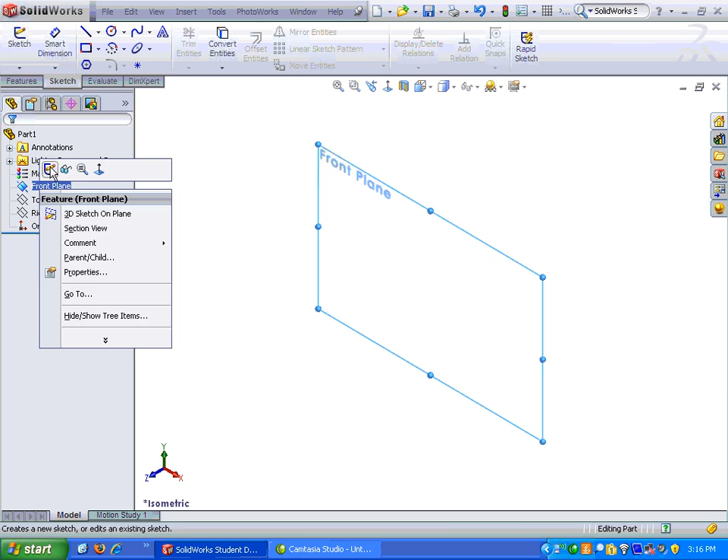Okay, first place we're going to start is the front plane, and as I get the front plane turned on, I will talk to you about how we're going to accomplish this. So front plane, hit the sketch button that rotates it for me. I'm just going to zoom this over into the corner a little bit.

And notice on the picture, on the documentation, we are going to sketch this portion of the wheel. Then we're going to mirror it over to the left side over here. Then we're going to put in a center line down here and revolve it around the center line to produce our wheel. It's kind of a fun little drawing.

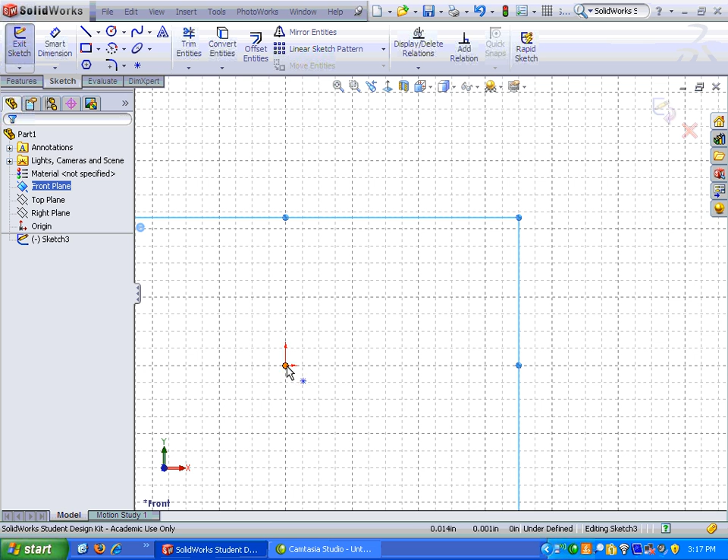Alright, so I'm just going to take the line command, and I'm going to hover over the origin. Maybe I'm going to take the line command. Right click line. Let's try it that way. I'm going to hover over the origin so I'm straight above it. And I'm just going to start sketching this profile in. And about 0.75. Remember, we're going to come back and dimension this.

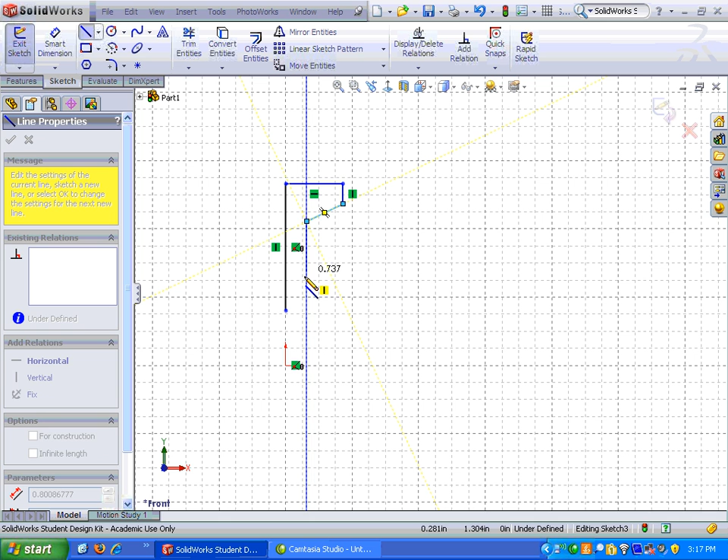Now I want to make sure that this line is on an angle right here and not locked in horizontally. So I'm going to come down. And I don't want to lock this in up above. I want it to actually be a little bit shorter, but I do want to lock it in. There we go. So let's start with this sketch and see if we can put some dimensions on it and make it look the way we want to.

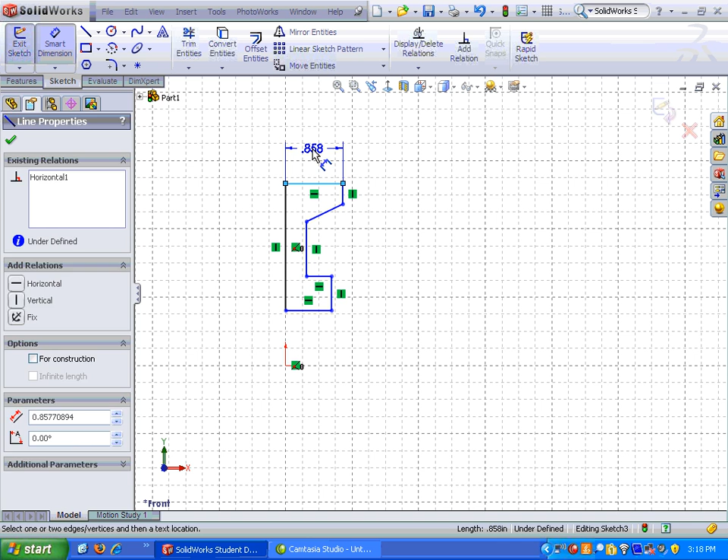I can either hit dimension here or right click and start dimensioning. I can see on my profile that this dimension is 0.75. And I'm going to do this as quickly as my computer will allow. I can see that the bottom one is 0.6875. This little line right there is 0.125.

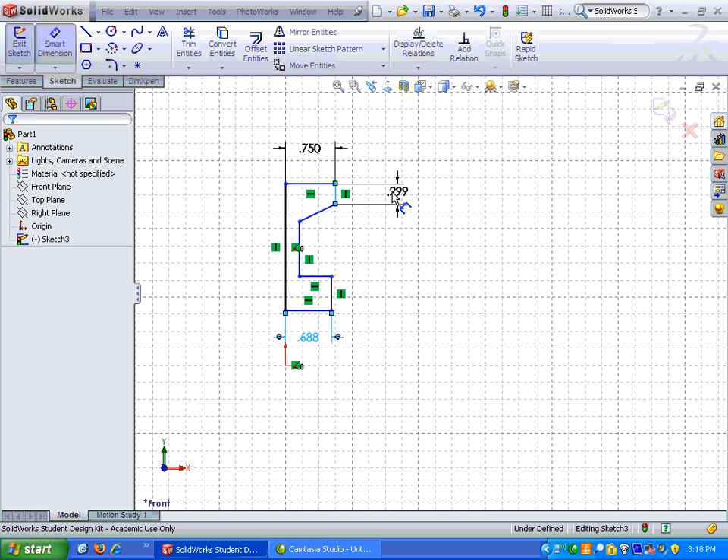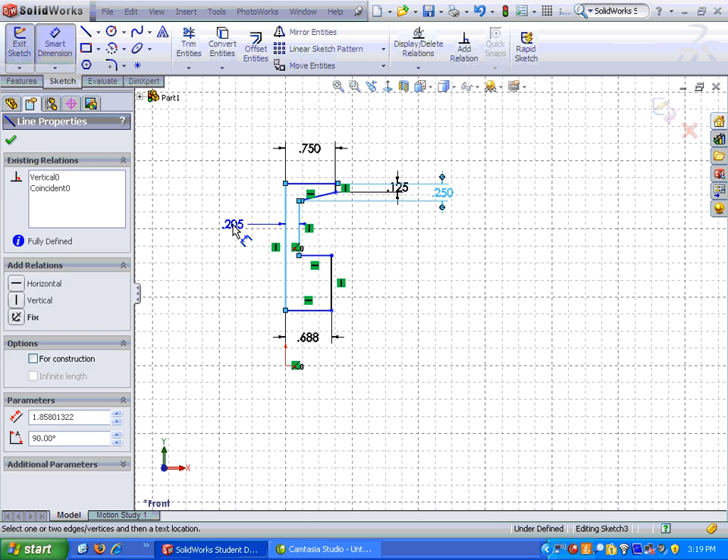From the line to the corner of this one, I'm going to pull that across, and I believe that one is 0.25. Okay. The height, well, we can get the distance here, and it doesn't really matter the order I put these in. This distance is 0.25. Let's put in a couple more dimensions.

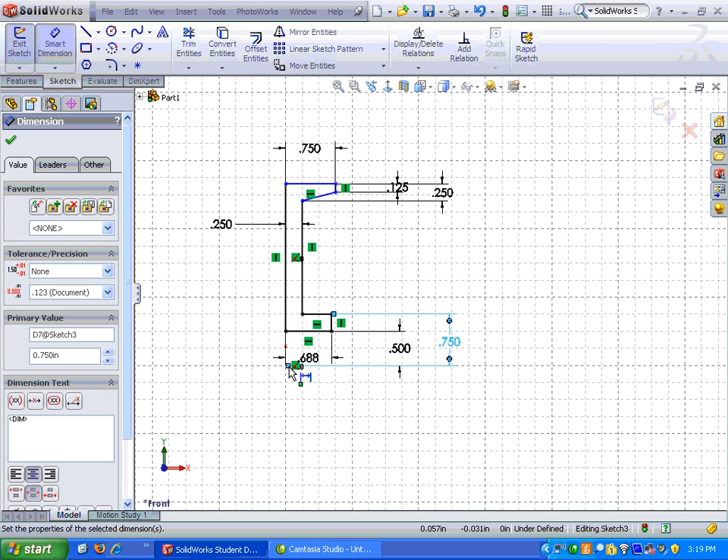I know that the hole goes to the origin down here, and it's a 1-inch diameter hole, so I'm going to dimension the radius here at 0.5. Let's see, from the origin again, I'm going to go to the next line up, and it is 0.75. And then we have one more, our overall, and that's again from the origin. The top line is 2. All right.

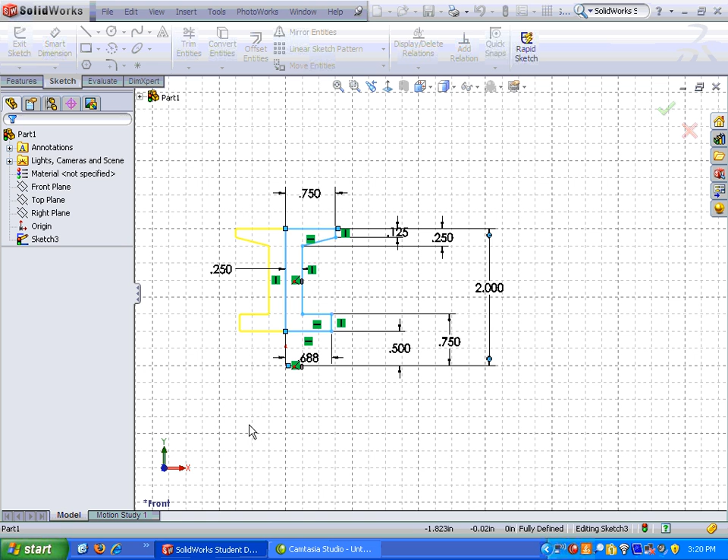So let's go ahead and mirror this across to the other side. And I'm going to go up here to Mirror Entities. And my box on the left is looking for the entities to mirror. So I'm just going to pull a box over all of those items. And it wants to know which line to mirror about. So I'm going to click in that box and make sure it's highlighted. Then I'm going to highlight that line right there. And you can kind of see the profile coming in on the other side. I'm going to hit the check mark. And now my sketch is on the other side.

What I haven't done yet is put in my center line down here where I want to mirror around. So I'm going to click on the flyout menu underneath line and click on center line. I'm just going to come in over here on the origin and put in my center line. And hit the check mark. And we are ready to revolve this.

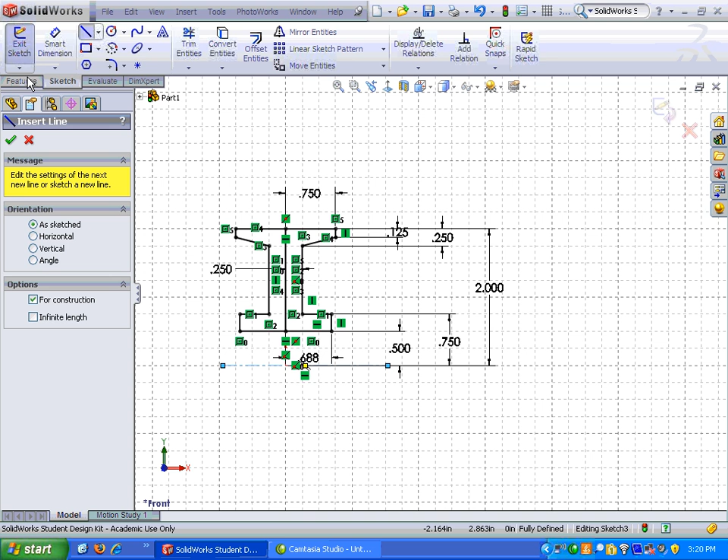So let's go up to Features and Revolve. And it has picked line 16, it looks like, right there. Selected contours, I'm just going to click inside of here and inside of here, and that picks both of them. I can hit the check mark, and I should get my wheel.

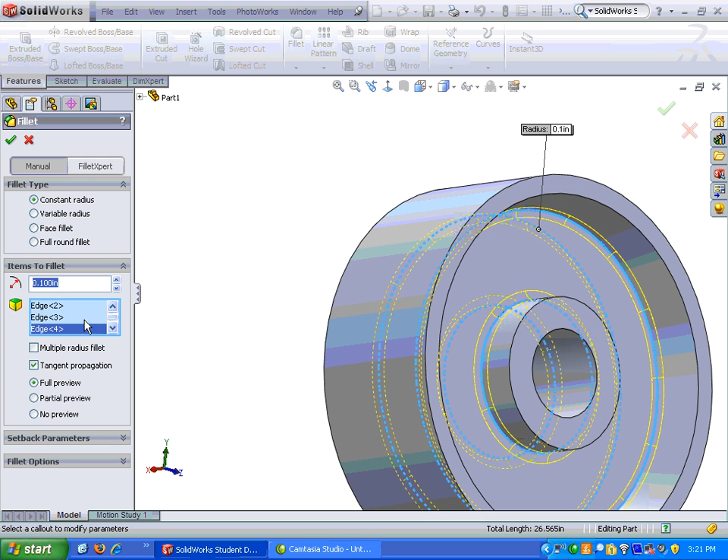The last operation on my wheel is to put in some fillets. So let's go to the fillet command on the features palette. And I do not have it on there, but I believe that the fillets are 0.125. So I'm just going to click on these inside corners and make sure I get the edge and not the face again. So all my edges show up here. My fillet radius 0.125. Hit the check mark, and my wheel is completed with my fillets on it.